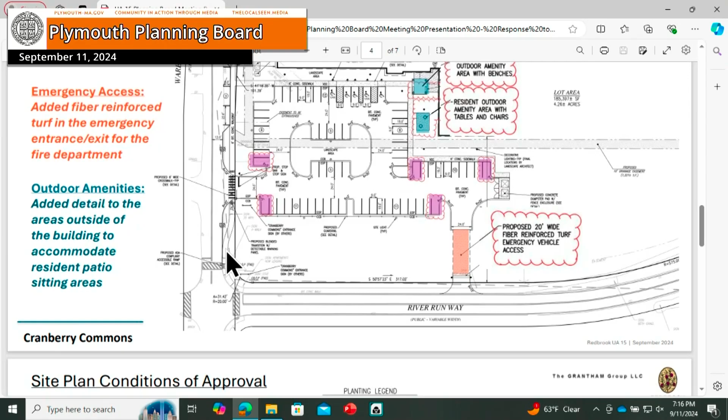What we're showing here is a copy of the plan as resubmitted. As Walter noted, we've increased parking by 5 additional spaces, shown highlighted in pink purple. The emergency access area is identified as a 20-foot wide fiber reinforced turf emergency vehicle access. We chose fiber reinforced turf for the reason Walter noted, but also because it's a product we've used on site before in use area 6, so it's consistent with what's already on site.

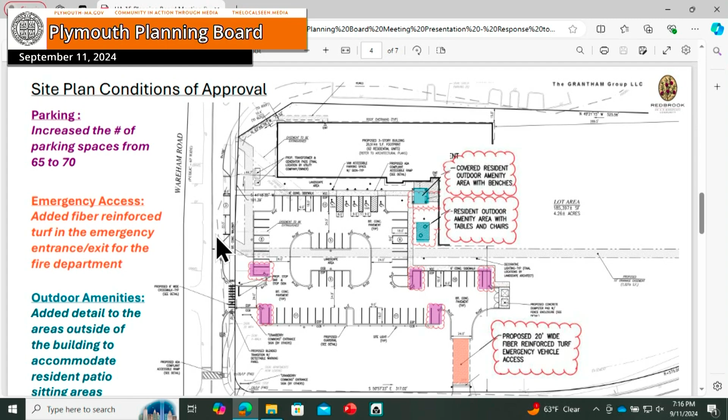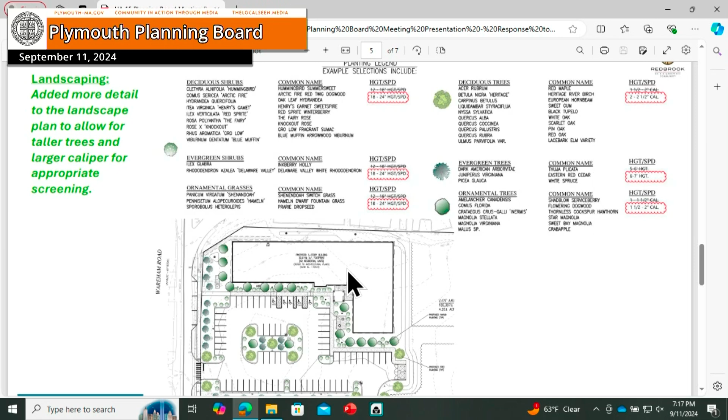The outdoor amenity areas, as noted, include the covered area with benches as you come into the project entry, and a small area providing accessible access right there. Finally, from the landscape standpoint, with the unknown of final utility locations, we increased the height and spread of the shrubs and smaller plant material, and increased the caliper sizes from what's typically installed. That gives us the highest and best flexibility to use larger plant material to actively screen what's been requested, meeting the intent of the condition. With that, I can open it up to questions.

First, let me bring it back to staff. Ms. Lind?

Pursuant to the board's approval of this revised site plan, we can issue a revised statement of recommendation to the building commissioner that conditions 2, 3, 4, and 6 of the August 15th decision are approved and satisfied as of this revised plan. Thank you.

Is there any member of the public who wishes to comment on this?

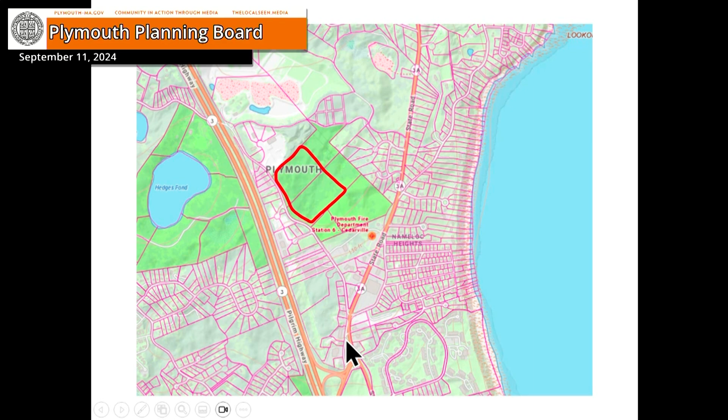So again, why we're here tonight, Mr. Bolton did read the notice, but all commercial projects in this town are subject to site plan review, this being no exception. Specifically for this project, we are seeking a determination from this board that this is a unified complex. The zoning bylaw allows under the unified complex provisions multiple principal uses on a single lot, multiple principal structures, in this case being 4 structures.

So again, we'll get into the site plan a bit more in the presentation here. But this is an overview. As I mentioned, we've got 4 proposed structures on site. We've got the largest structure here, 176,000 square feet. We've got a smaller structure here, and then 2 adjacent structures.

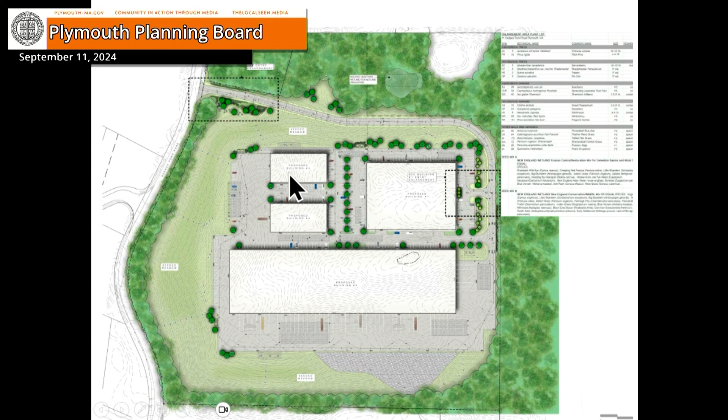You've had a chance to review the plan, but for those who haven't, this is proposed as a warehouse, or identified as a warehouse. This as an ice rink that could accommodate 2 rinks, in fact, based on the size. And these are proposed as potential lumber yard facilities here, with the 2 20,000 square foot structures on this portion of the site. Again, this is a rendering, gives you an idea of what the entrance is going to look like and some of the landscaping, just a visual.

I think it's worth pointing out that the driveway, such as it is, is really spec'd to be constructed as a road in terms of width, grade, type of construction. So it's a significant roadway to access the site.

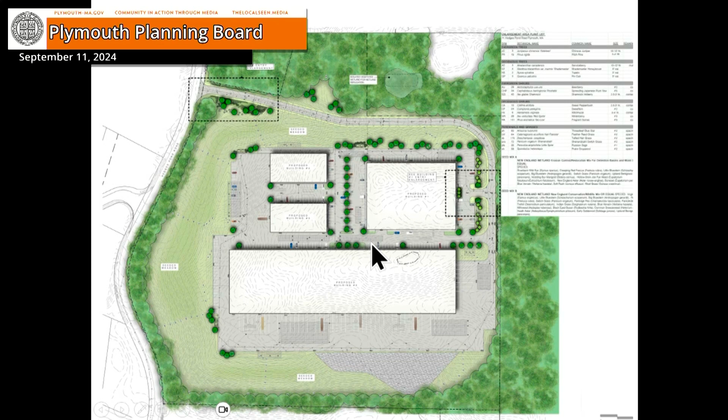And again, just going back, you can see it comes off Hedges Pond, kind of wraps around the outside of the site, and then enters the site, with circulation throughout. Fire's had a chance to look at it in terms of fire truck apparatus circulation. DPW's weighed in on it as well.

I thought I'd spend a few minutes, because this is a unique project and a unique site, talking about the history of this site. The history is important, because tonight and this project is just the culmination of what's happened here for many years, and the efforts of the municipality, a nonprofit foundation which currently owns the site, and other interested parties that have gotten us to this point. So I think it's important to have some historical context here.

This is not a project where a private developer comes forth, identifies or finds a parcel, and proposes a project. It worked quite differently here. The town designated this area for development, conveyed the property to a quasi-public entity, and issued requests for bids to develop it to its maximum economic potential. Here we have the product of many years of work that led to that.

Very briefly, the town first acquired this parcel along with much of the adjacent area. Our project site is about 33 acres, maybe 34. But this was part of a much larger acquisition. In the year I was born, 1977, 175 acres were acquired, designated or intended at the time for a future landfill. In fact, there was a landfill built on a portion of the land. That landfill has been decommissioned, so to speak. It's been capped. Plans to expand the landfill fell to the wayside, and for many years, the site lay fallow.

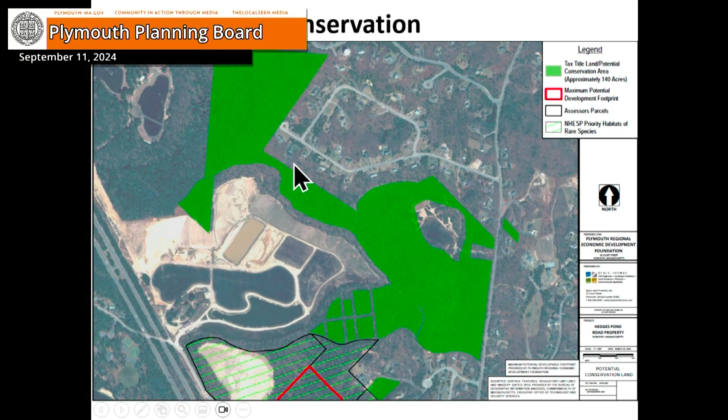This gives you an idea. Down here is the edge of the development portion of our site, the edge of the lot line, really. And this is the approximate 140 acres that were conveyed to conservation. So that gives you an idea of what was on the table at the town meeting.

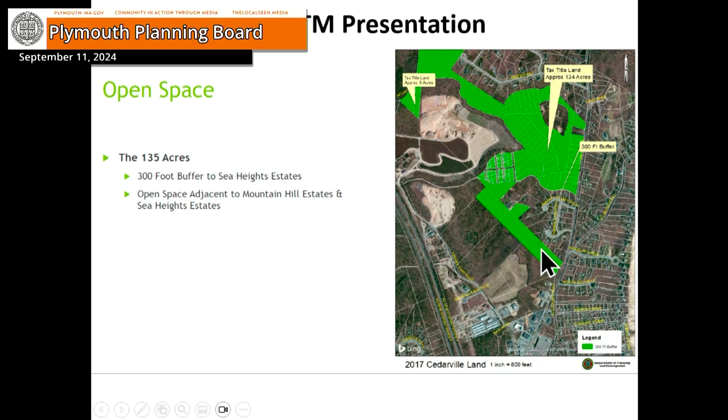That was designed to assuage any concerns relative to the neighborhoods here to the east. As you're aware, typically when you have a buffer, it's 50 feet sometimes - a buffer between zoning districts, between residential and other types of zoning districts. 50 feet's required. Here we've got a 300-foot buffer. So this was all quite consciously designed by staff, by the planning department, and walked through town meeting.

In fact, there were quite a few bodies involved in this project early on. You can see them right here - I'll read them for you. The Cedarville Steering Committee, obviously the local steering committee that probably represents the most immediate neighborhood interests, they supported the article. This board supported the article. The Open Space Committee supported the article, and I think - I'd have to check the archives - but I think it's quite rare, this article was unanimously approved in 2018. So this was a product of many interested parties and resulted in a quite favorable outcome.

Let's fast forward a little bit. As I mentioned, 2018 was when the stage was set for the development, but the efforts obviously started a couple years before that.

The town engaged engineers, designed the site thoughtfully, as I pointed out with the buffer, analyzed what was appropriate for the development. When the zoning bylaw was written, there was cognizance of what uses were appropriate for this neighborhood, for the site, and what the town's vision was for this site.

Then in 2022, after town meeting, the town conveyed this land to the Plymouth Regional Economic Development Foundation, who currently owns the site. My client is under contract to purchase the site.

So today, where are we? How did we get here? I think it's worth noting a little bit of the history of the recent efforts by the foundation to develop the site. They've entertained a number of bids, sought the highest and best use, best for the community, best for the economy, et cetera.

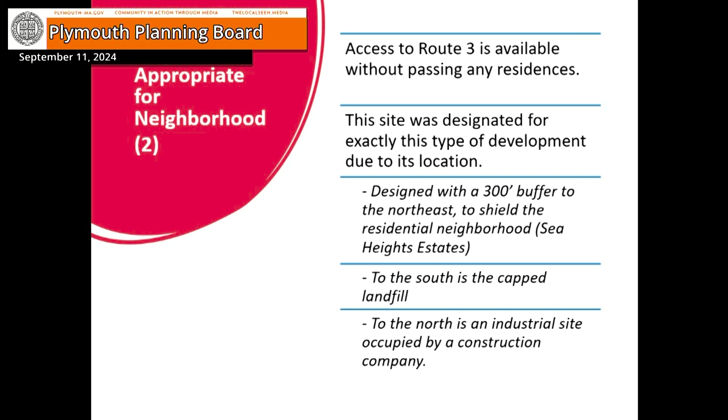What are the benefits to the town? As most of you are aware, but for those who aren't, $2 million when this transaction closes are going to be earmarked for traffic improvements.

Now, is that enough to build a rotary? No, but it's enough to start a project that's been talked about for many, many years. It's a first step toward improving the traffic in and around Hedges Pond, particularly where it intersects with State Road. This is a monumental first step toward solving a problem that's existed for a very long time, and this was all quite consciously laid out.

Furthermore, this project also contemplates some improvement to Hedges Pond itself in terms of drainage. What else? Again, this is coming out of that 2018 recommendation from the planning board to bolster the town meeting. The site's location is within a village center and its close proximity to Exit 2 makes it an excellent site for economic development activity.

Again, that's what this site is for, that's what its best use is for. The town continues to explore options to increase its non-residential tax base and to provide quality employment opportunities for its residents. This initiative represents one such option, economic development. No coincidence that the current steward of the property is the Economic Development Foundation.

So in addition to jobs, commercial tax base, I think we've got some uses here. When I mentioned why my client is moving forward and others didn't, these are desirable uses. Lumber yards are useful and critical in some cases to local businesses. The ice rink is a tremendous public amenity if that comes to fruition like we hope it does.

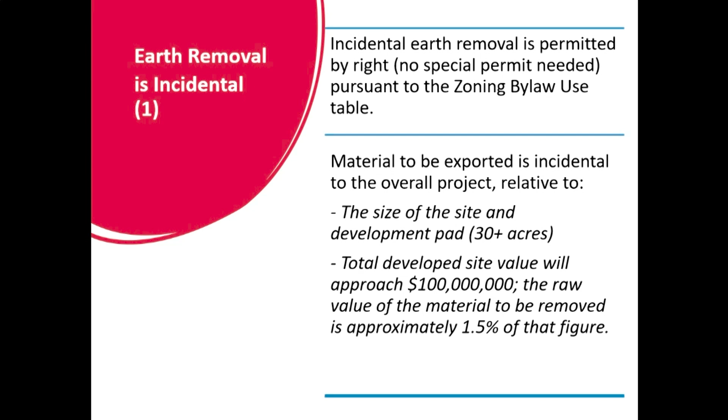As you can see on the slide, the raw value of the material coming off site is a tiny fraction, less than 2%, closer to 1.5% of that total valuation.

Now, there's been quite a bit of material online, social media, kind of accusations or suggestions that this is some type of windfall, that this is a money-making enterprise in terms of sand. The developer would never recoup even his purchase price by the value of the material coming off site. If the material were to be removed and sold, the amount that's intended to come off site, and the site to be even just graded out, the purchase price alone would put this project deeply in the red. So that's not what this project's about, just to be very clear.

I'm not even going to read this slide. I don't want to do justice to it or give it any more airtime, but the notion that there's some massive windfall to the developer from the material that's coming off relative to the grading is just a fallacy.

So nonetheless, we've got incidental earth removal. In my view, and I hope the planning board's too, we're not subject to a special permit in this case. Nonetheless, my applicant is willing to accede to the types of conditions—the actual conditions, verbatim from the zoning bylaw—that the Zoning Board of Appeals has to select from relative to their regulation of earth removal, were a special permit to be required.

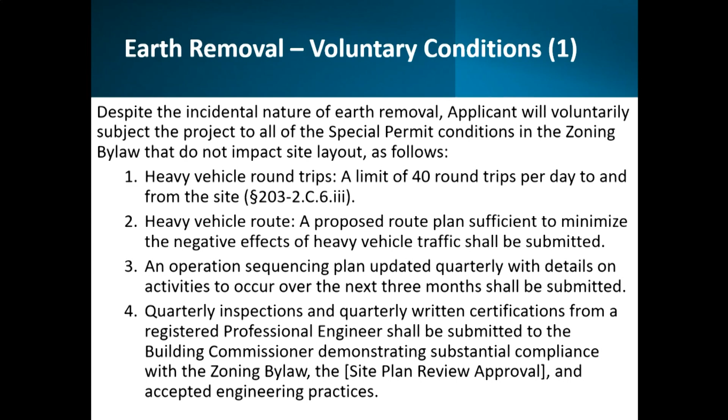It's a little much, I don't need to read every word. I'm happy to send this to you, but all of the regulations designed to provide for a safe, stable site with oversight that's not a nuisance, et cetera, we're willing to adopt all those voluntarily. A limited number of trips, a sensible route that's not disturbing any of the neighbors, industrial or otherwise, a sequencing plan, inspections, certifications from an engineer—all the conditions the ZBA might want to see if this were subject to a special permit are acceptable to my client.

It's not going to be a large cut that sits open. It'll be stabilized and done in sections, and I think for geotechnical reasons that's sensible as well. You don't want to have a big cut—when you've got low areas, you've got to grade, compress, test, regrade, et cetera. So again, it's perfectly acceptable to stabilize and work this project in phases.

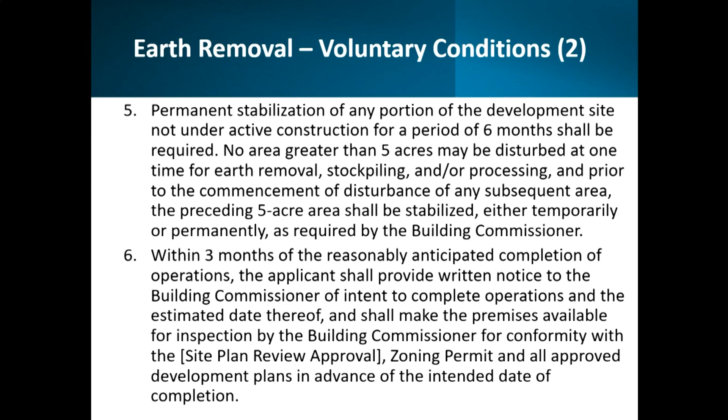Notice to the building commissioner as we approach completion, inspections, oversight, et cetera. A cash bond—not something that is required, but happy to do it in good faith to ensure the developer is good to his word and stands behind the project, effectively putting his money where his mouth is. And a 3-year time limit is perfectly acceptable, though it should be far quicker than that.

So I've got with me Kevin Flaherty, as I mentioned. I think it's worth having him talk a little more about the earth removal, why it's proposed the way it is, and a bit more about the profile and topography of the site, if that's okay with the board.

Absolutely, please proceed.

So what the applicant kept coming back and saying is, these are the people who would be coming in to buy the property, and I have interest from this standpoint and that standpoint. So really what we had to do to create the project, to get a base down, was figure out the square footage we needed at the bottom of the slope as a flat area to handle all sorts of development that would be coming through.

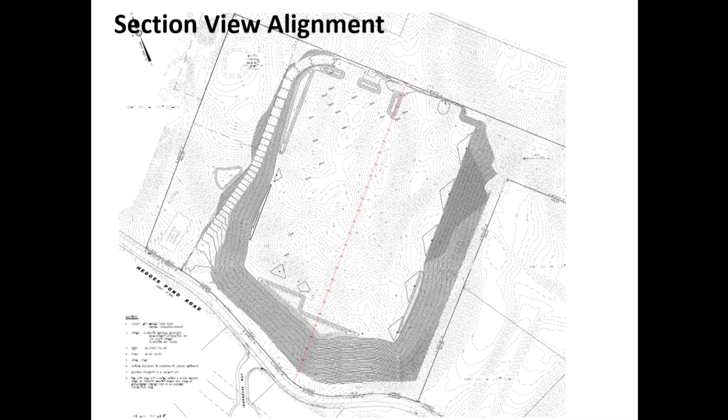So what you can see there is, and the profile might show it better, it's a little faint, but on the plan the red line is the existing topography for the site. It comes down very sharp, all the way down to the very bottom of the basin. This is from that cross section on the last slide.

So what we're really doing is creating this platform. We're cutting up by the road and moving all that material into this large area, which is about 700 to 800 feet wide and long, give or take, and having to fill that up about 35 to 40 feet to get to the building platform elevation.

In conversations with our client, we figured out we're going to have to do all this geotechnical work, because where that low area is shown on the plan, we have 2 or 3 of the buildings. So working with contractors, the best way to present this to the building department for a permit is to fill each of the 35 feet in 1-foot lifts with structural information, with geotechs on site, to be able to present to the building inspector that this site is suitable for the size buildings we're putting there and that there will be no structural issues going forward.

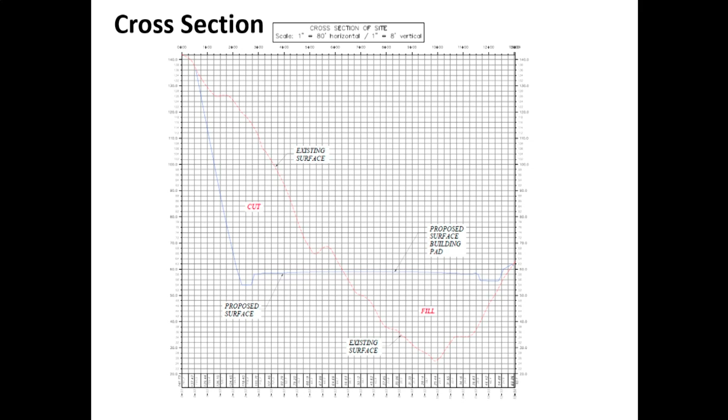Mr. Timbrosa, why don't we complete the entire presentation and then we can bring those questions back. Yeah, absolutely, thank you very much. And when I yield the floor, if I could, Mr. Bolton, Mr. Chair — Bill Sims, the attorney for the property owner, would like to speak briefly, if that's okay.

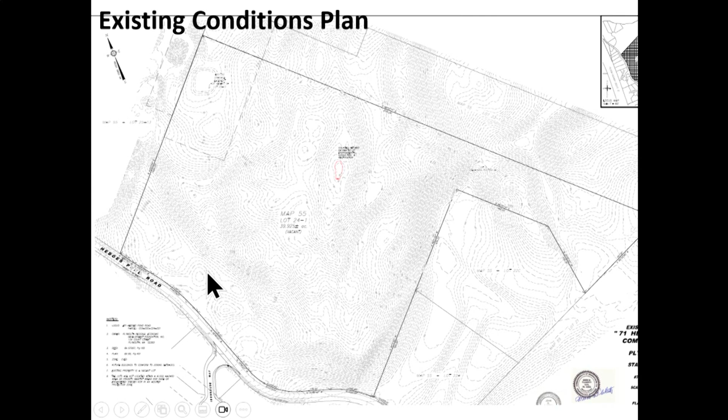So again, we've got plans, I think I've walked you through them. Kevin could probably do a better job than I could, but as you can see, existing conditions show this site with wildly varying topography running from Hedges Pond down lower to the rear of the site. This is the lotting plan, which again shows the lot in question, the subject of this proposal. This is maybe a little more zoomed-in site plan, so you get a better look than that initial colorized plan at the dimensions of the building, the loading areas, the parking, et cetera. Happy to go into it, but at this point I think it's a relatively straightforward layout.

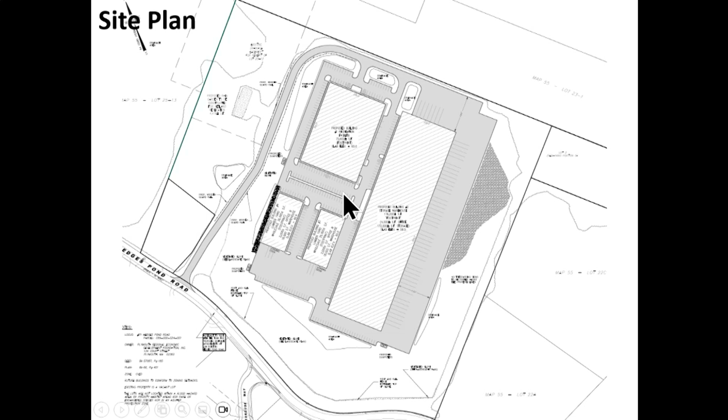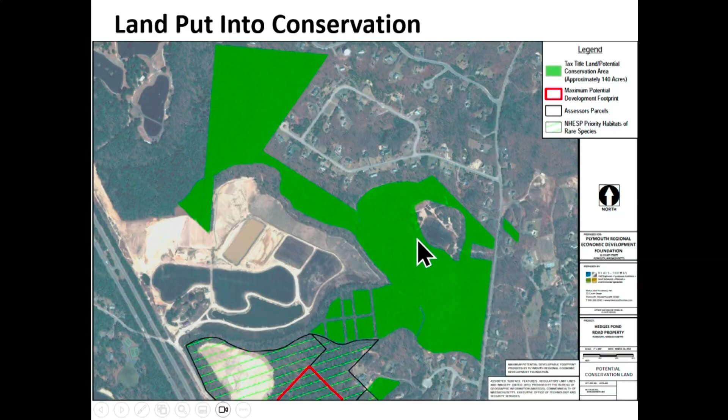More detail here — if you wanted to go back to these, I've really got them for reference if anyone has a specific question, but that's effectively what I have for you. I'm going to go back to the colorized plan to leave that on screen in case it's helpful. And if Bill wants to have a word, that'd be great.

Good evening, Mr. Chairman, members. My name is Bill Sims. I am counsel to the Plymouth Regional Economic Development Foundation, and I am not presenting. I just want the board to be aware that the foundation is fully supportive of this particular project. We have evaluated it — this is not the first time we've had a project presented to us, but we've done a fair amount of due diligence, have met with the developer and counsel, and at this point we are very supportive of the project, and just want to be on the record for that.

Thank you. Thank you, Mr. Sims.

At this point, because we are not taking a vote this evening, we do not have staff recommendations. So I am going to bring this to the board for questions to the proponent. You want to go first, Mr. Grandy? Okay, thank you for the presentation. I know there's no vote happening here this evening.

As far as the 350,000 cubic yards of fill being removed, is that the actual number? Has that been determined by your engineer? Yeah, so we ran our calculations. We also sent it out to a contractor for bid, and it fell in that same kind of range, with just a one-to-one kind of calculation.

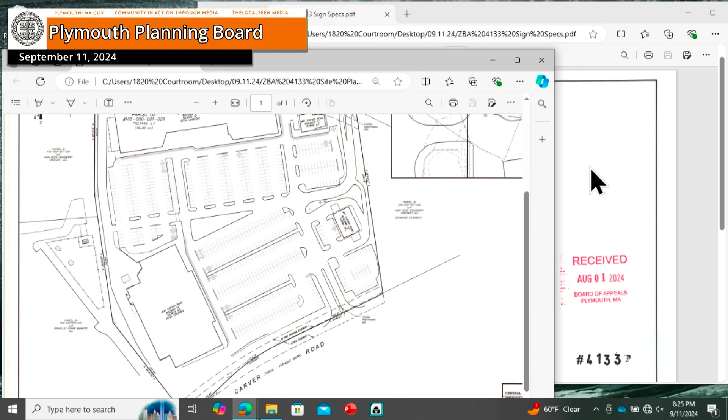Anyway, we have people here to address most of the issues. This is a request for a special permit per 203-3, section D.4.D. The sign to be located is within the 10-foot setback, and accordingly we will need permission from zoning and respectfully request a favorable recommendation from the planning board for this particular pylon sign.

I will let Don walk you through the project and address the specific questions that you may have for this. I'm going to guess that everybody is pretty familiar with the location, as some of you sat on the previous case.

For the Carver Road entrance, this is on the Route 80 side. As you come in from that side, there are two entrances. This is the first entrance you'll approach if you're coming north to south, and it's a location where signage is super important to direct traffic and for presentation of the businesses located within the plaza.

Without consuming too much more time on that, I'll turn this over to Don Bracken to explain the engineering and signage location and address any questions the board may have. Thank you, Don Bracken, Bracken Engineering.

As Bill said, the project abuts two roadways, Carver Road to the south and Plympton Road to the north. Almost 2 years ago, we received a special permit from the zoning board to have more than one sign on the property. There are currently two signs on the property, the main sign at the main entrance on Carver Road and another sign, both pylon signs, just to the east of the Papa Gino's on Plympton Road.

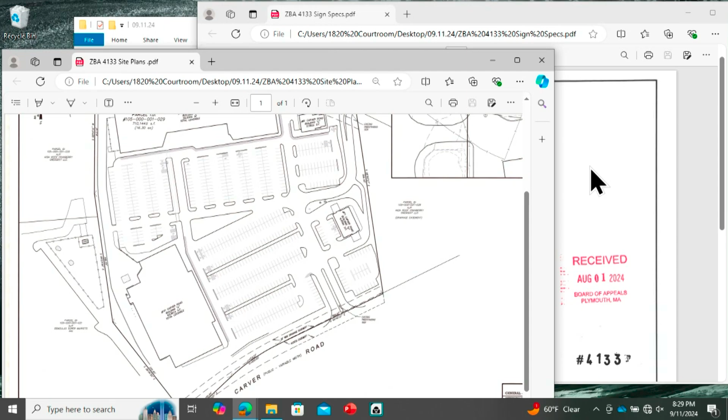Thank you, I'll take it back to staff first. Ms. Lind? Thank you. As you've been informed, this was previously approved by the Zoning Board of Appeals back in 2022 for the sign, and the design was consistent.

At this time, the applicant is coming back for the location of the sign. Given that there's no substantial detriment to any pedestrian or neighborhood impact, we do find this is an appropriate use in the general commercial district.

We are recommending that this be recommended to the Zoning Board of Appeals to be granted pursuant to the following conditions: that if any back taxes, fees, or penalties are owed to the town, evidence that those are paid be provided; any lighting will be compliant with our light pollution section of our bylaw; and as this is within the Mass DOT state roadway, that they'll have to work with the State Department of Transportation on permitting for approval within the state highway layout.

And we've recommended that the proposed sign be pushed back. Originally, they were looking for a 0 setback. We're looking for 1 foot to allow for construction and survey tolerances. In additional information submitted for the application, Bracken Engineering has agreed to do this.

The final conditions would be that the petitioner is encouraged to improve the existing internal traffic flow with signing and pavement markings to the extent possible, and that the address of the facility, 101 Carver Road, be included on the proposed sign. Thank you.

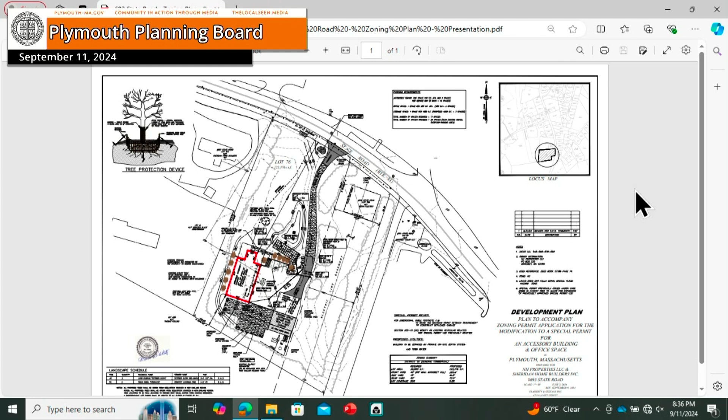So as Matt said, we're basically lining up the accessory building back where the existing auto body shop is. Holding 60 feet, which is the waiver we're requesting, wouldn't be practical in a situation like this with where the structure is.

The auto body was previously approved back in 1978 through a special permit. They had a minor modification back in the early 80s to expand it a little bit. So it hasn't been in front of any of the boards in the last 30, 40 years. This is just kind of an update of the plan, and that's where the building department wanted to go with it.

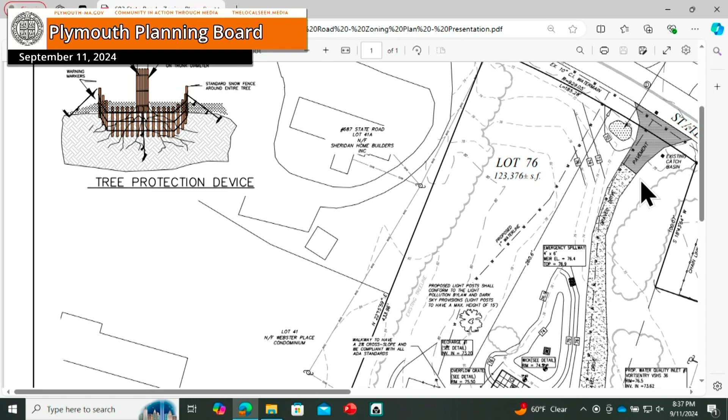We have the building on the right side of the property. We're not really changing any of the access or the state curb cut up here. We're adding a little bit of drainage per conversations with the DPW to handle, even though we're not altering this at all, just an improvement from runoff going onto State Road.

There's this existing asphalt and concrete pad here, and our new building is coming off this way. This will all be asphalt. They currently have no treatment for the existing runoff on site, so we're adding catch basins and a water quality unit here to treat any impervious runoff from the asphalt areas and put it into our new recharge system, which is right here.

The back area over here is existing gravel, but we're going to leave it as gravel parking and designate better spots for employees to park behind the building, to clean up the site a little bit.

This is the existing tree line over this way. We have no intention of cutting any additional area into the buffer—we're actually going to plant a couple additional trees. I don't expect there to be any visual impact from the multi-family apartment building over here; the grade drops back down, so there's a wooded berm between the two properties. But as a good gesture, we're adding a couple of trees on the backside and up here by the parking area.

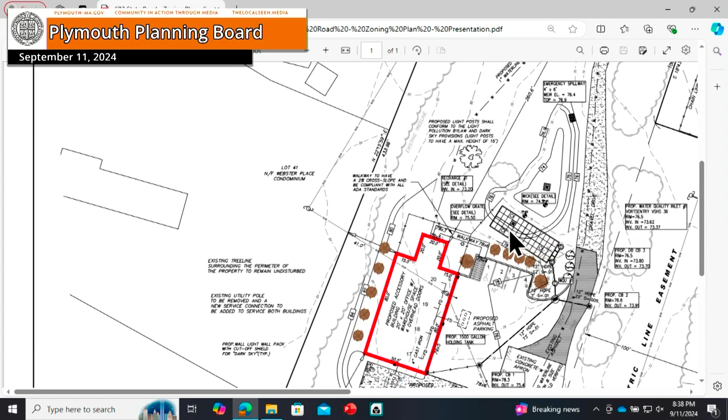DPW wanted to make sure that this walkway here to the new office was ADA compliant, so we've met that. Septic systems are over here.

Mr. Bennett brought up at the steering committee meeting that the existing bay, which we didn't catch going through it, still had an oil grit separator that went to the existing leach pit. So to bring this up to code with all the rest of the building code standards, we added a new 1,500-gallon holding tank back here that will act in place of where everything was going to the existing septic.

We're also doing a little improvement on the existing building to clean up the whole site, which hasn't really been altered too much over the years. And I think that's it.

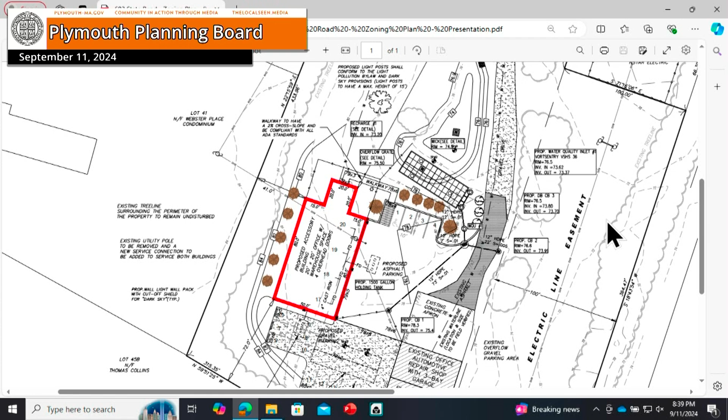Really, we're limited to this side of the site—there's this massive Eversource or NSTAR easement, a 100-foot easement, that runs all the way across. So that's why we're holding everything that way. But I'd be happy to answer any questions.